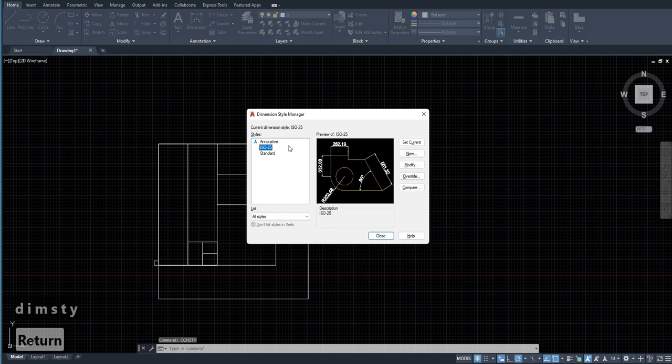So, to insert annotative dimensions, you just need to go to the dimension style by using the DIMSTYLE command and press enter. Over here, you can choose the annotative dimensions and select to modify them. Over here, the arrow size is written as 2.5. I think that is pretty convenient for me.

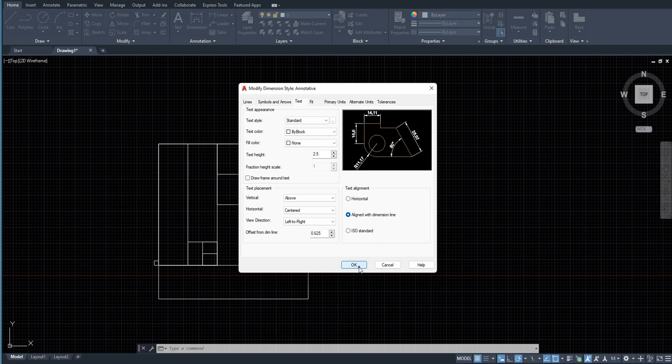Second, I'll just go and see the text size, that is also 2.5 millimeter. I guess that is also quite convenient for me, and I can just select OK, and close the dimension style manager. Over here we have the annotative dimension active.

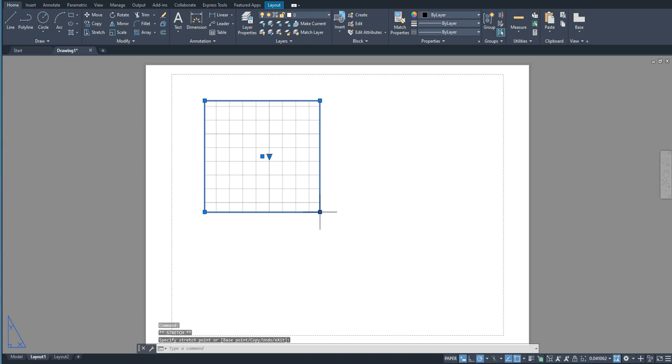If we go to our layout tab and we see our viewport, we can see that there is one viewport. I am going to make two viewports over here with different scales. So over here I'm going to make one viewport with one scale. Say 1:20. 1:20 is also quite big. Let's make it 1:10.

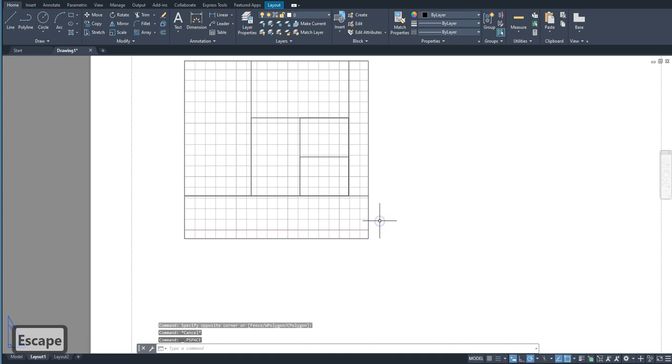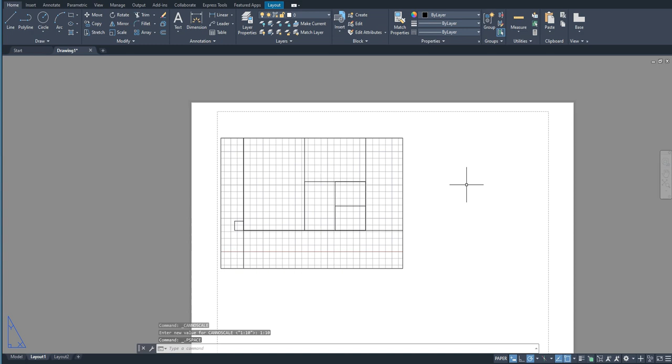In this video, we'd also be learning how to work in multiple viewports. So over here you can see I have one particular viewport on. This is my one viewport. And to insert another viewport, I'm going to enter the command viewport. And I'm going to click on OK here.

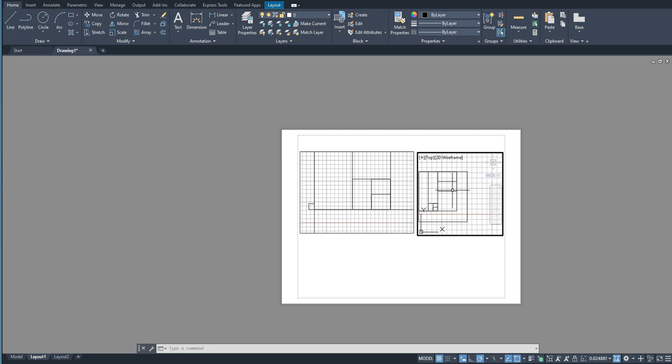I'll specify the first corner of the viewport and the second corner of the viewport. Over here I can already see the object that is there. You can select the scale, say 1:50. 1:50 is quite too big. I guess 1:40 would do fine.

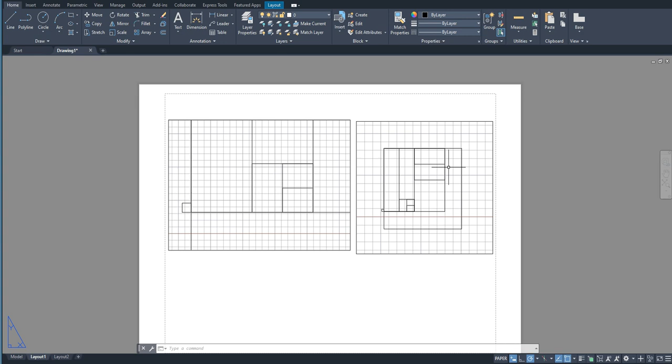So we have two viewports over here. This one is a detailed view and this one is an overall view of our object. This one's scale is 1:40, whereas this one's scale is 1:10. So let's just go back to our model. Over here we can select the scale to 1:10. So that means that 1:10 is going to showcase this particular viewport.

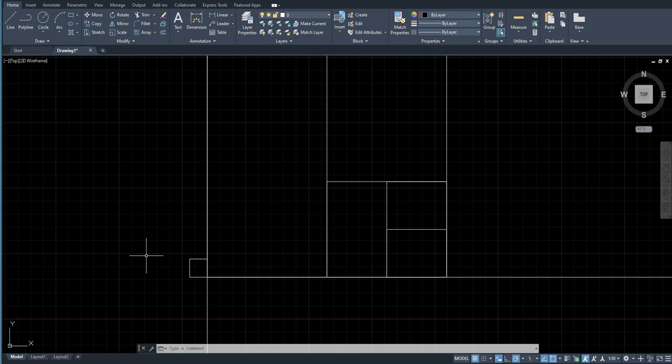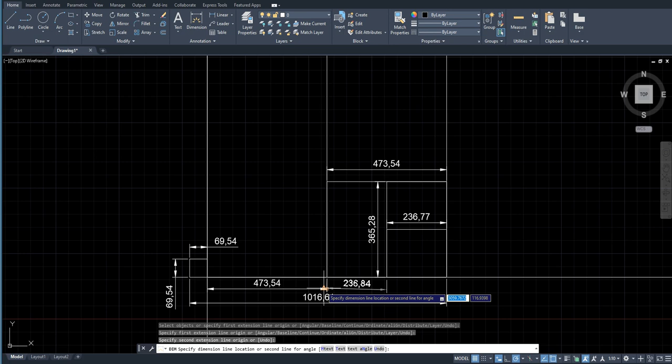I'm going to enter dimension styles and mark my dimensions. As you already saw over here, we took completely random dimensions. And now I'm going to make dimensions for the scale 1:40.

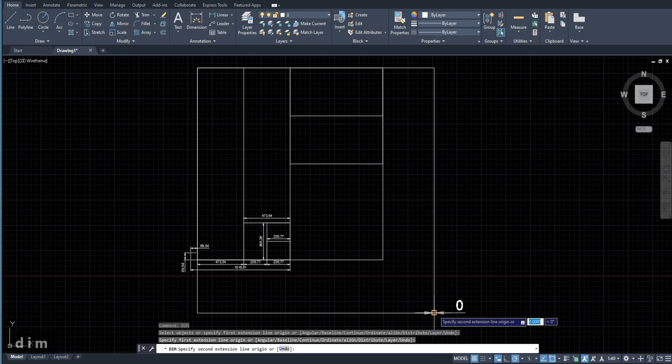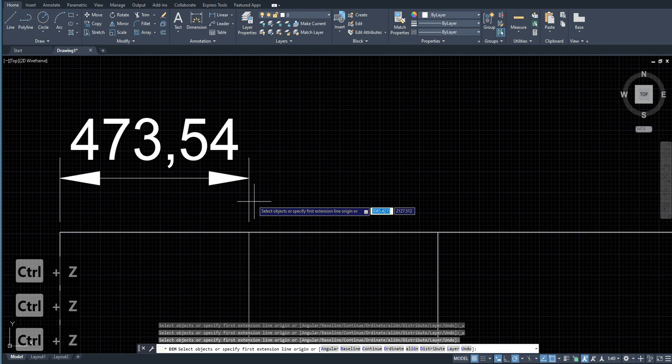If you saw what I did, this is a pretty quick way of making dimensions. I just pressed Ctrl+Z to teach you. You just make one dimension, and if you want to make dimensions in continuation, you just select this particular line, select the extension line over here, and you can just continue making dimensions. That way you won't have to double click to make each and every dimension.

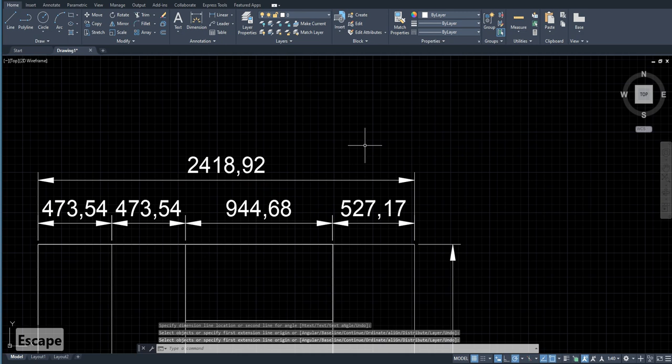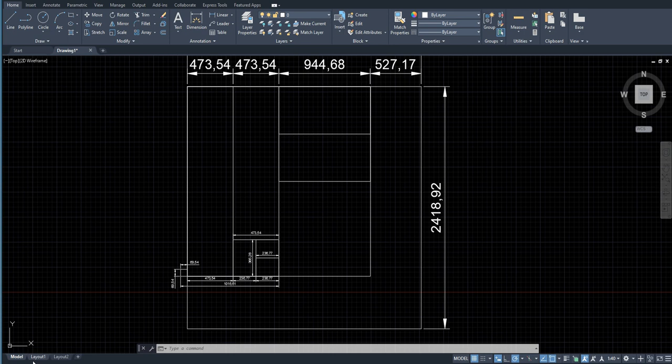You can also turn on the ortho mode if you want your dimensions to be perfectly horizontal or vertical. That way it'll avoid making mistakes. Now you can see over here that we have dimensions both in scale 1:10 and 1:40. Now if you go to layout 1, you can see that these appear to be the same size on the paper, that is 2.5 mm.

If you notice that these dimensions are not appearing over here, that's because this viewport is made in scale 1:40. So only dimensions which are made in the scale 1:40 are going to appear over here. Similarly with this viewport, only the dimensions that are made in the scale 1:10 are going to appear here. That way your drawing can be neat, clean and organized at the same time.

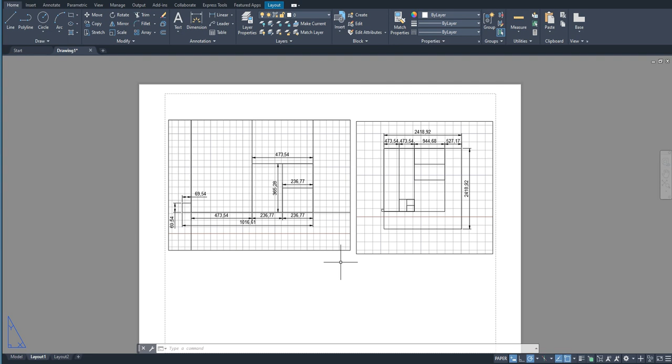Now let us see the command hatch. Going back to our model, I'll just delete all these dimensions over here.

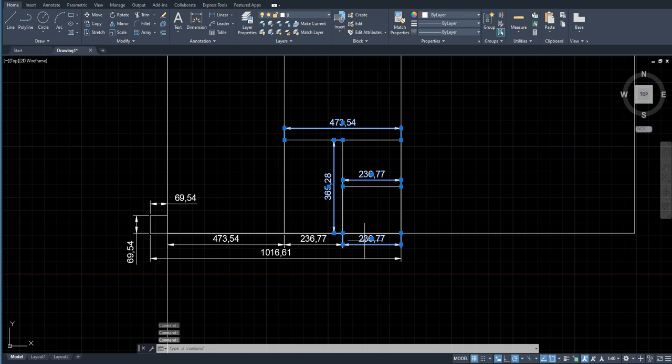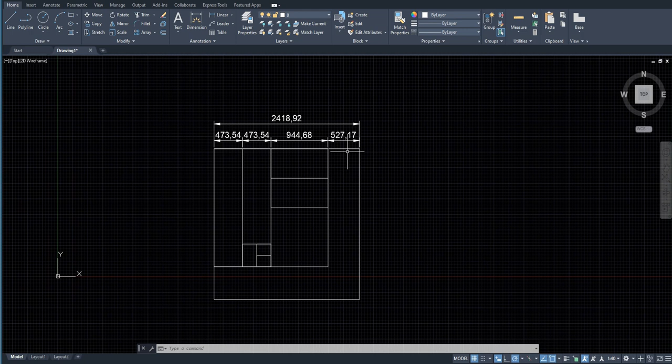By the way, I'll just tell you a new trick that just came to my mind. If you are really lazy or you just forget to change the layers while making dimensions, for example, if I want to put dimensions in one particular layer, and I always forget to change the layers while making dimensions, I mean I am forgetful like that. If you are like me too, then you can just use the command DIMLAYER.

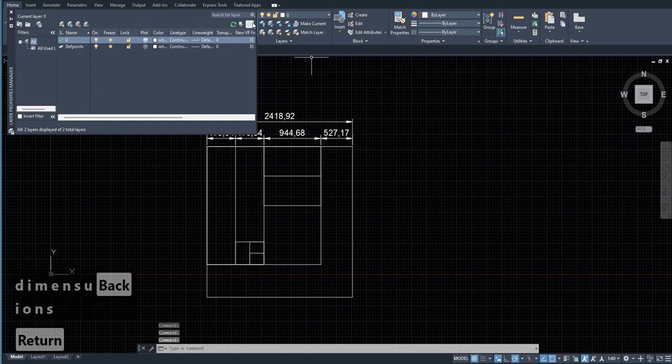Press enter. It's asking me if I want to put all the dimensions in the current layer, but I'm not going to put them in the current layer. I'm going to put them in the layer dimensions. I'm going to press enter, and if you see the layer properties, there would be a new layer called dimensions.

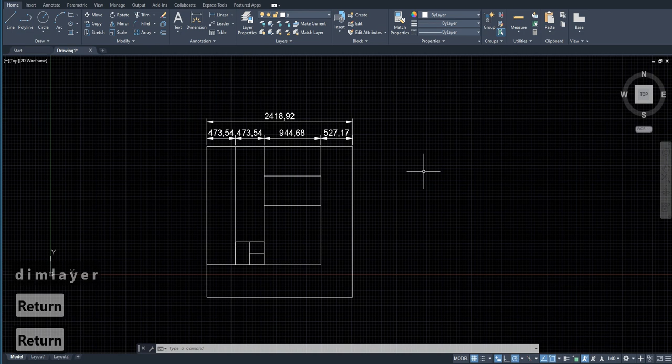I guess I didn't create the layer beforehand. I'm going to have to do the process all over again. Dim layer, enter, dimensions, enter. Now whatever dimensions that I enter after this, they are going to be in that particular layer. For example, if I create a dimension like this and I select this, it's going to be in the layer dimensions automatically. So that's how the dim layer command works.

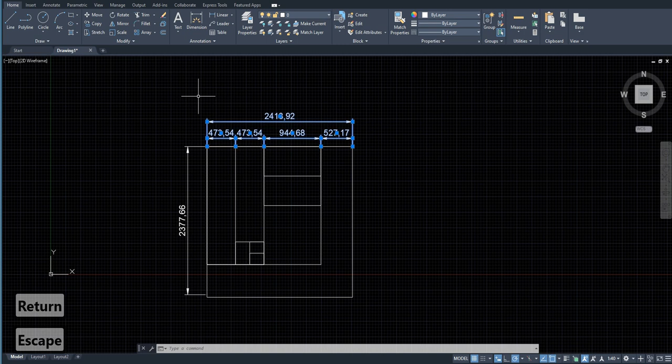If you have it on, good for you. If you don't, if you remember to change the layer each time you enter dimensions, then it's good for you as well. The next thing I'm going to be teaching you is how to work with hatches. So hatches are fairly simple, and over here there's an icon. It fills an enclosed area or selected objects with a hatch pattern or fill.

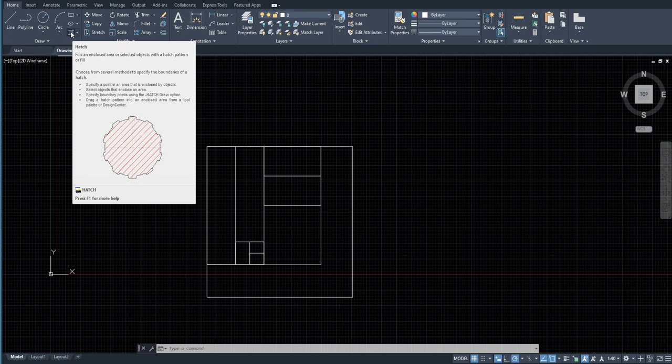So if you select the command hatch, a new ribbon over here appears. You can see that there are different patterns over here: solid, angle, and bricks, concrete, roof, clay, flex, grass. There are all these different hatches available over here. You can also use solid patterns, you can use gradients, or you can use user defined options as well.

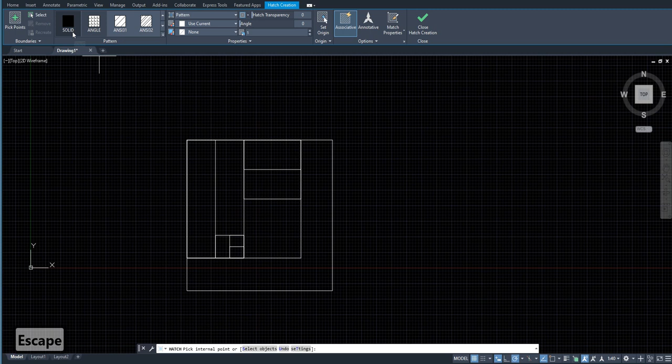You can change the layer, you can change the color of the hatch, you can change the transparency, the angle, the scale, etc. Now let me just show you how the hatch command works. I just press on the hatch command, use a solid tool, and just go over any enclosed area, for example this rectangle over here, and click. So now this rectangle is hatched, but as you can see there is no hatch visible. That's because we selected a solid hatch over here.

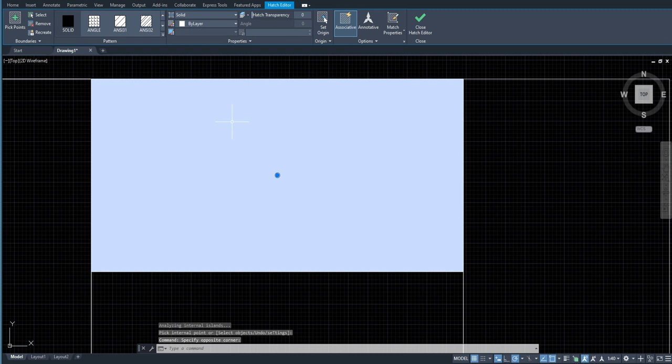If I change the hatch to this, you can see it's still appearing to be solid. That is because the scale is set to 1. If the scale is set to 1, that means that the distance between these two lines is going to be 1 millimeter. So if you want to change the scale, you can change the scale to say 10. Now you can see the hatch very clearly.

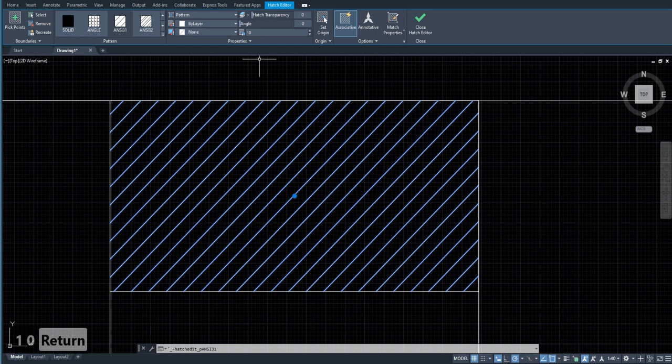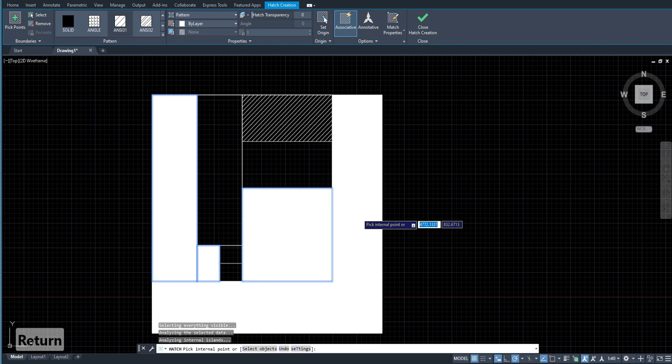If you want to hatch multiple objects at the same time and you want the hatch to behave as one singular object, it's fairly simple. You just select it, go over different areas, and press enter. You can see how these different objects are appearing to be a single object. You can increase the scale of the hatch by pressing enter.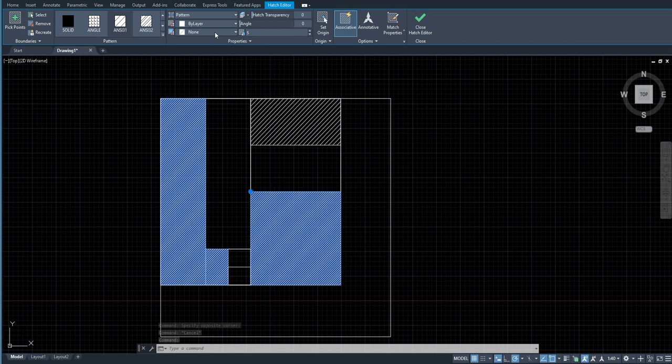You can also change the color over here. There are various color options available over here. You can change the color to say this. You can change the color to anything. This particular option changes the color of the hatch. For example, it changes the color of the line over here. If I choose this, it changed the color of the line.

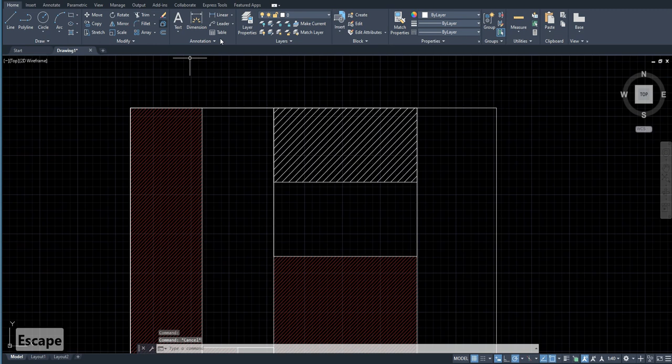But if I choose this one, it's going to change the color of the background of the hatch. For example, if I choose yellow, it changed the background of the hatch to yellow. I'm just going to delete this hatch for now.

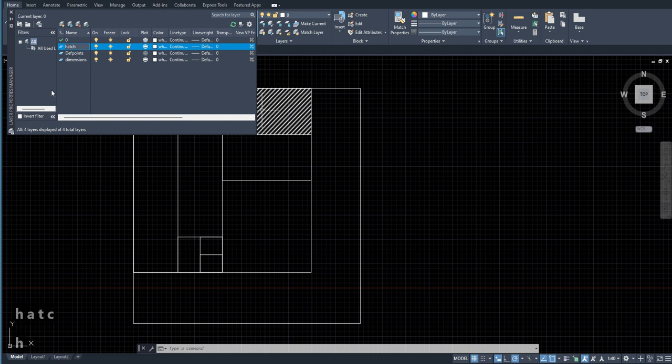Since I showed you one particular command in which you can put the dimensions directly into the layer of dimensions, you can also use a similar command for hatch. For example, if you just go to the layer properties and add a layer of hatch like this and press enter, we've created a new layer for hatch. The command for that is HPLAYER. Using this command, you can enter the layer for hatch and press enter. From here on, whatever hatch you do is going to go directly into that particular layer.

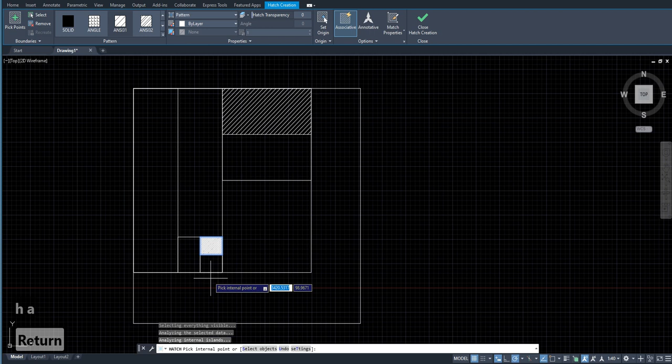Let's just try this feature out. I just pick this internal point and this internal point. If I select this and go to the home tab, I can see that this hatch has appeared in the layer hatch.

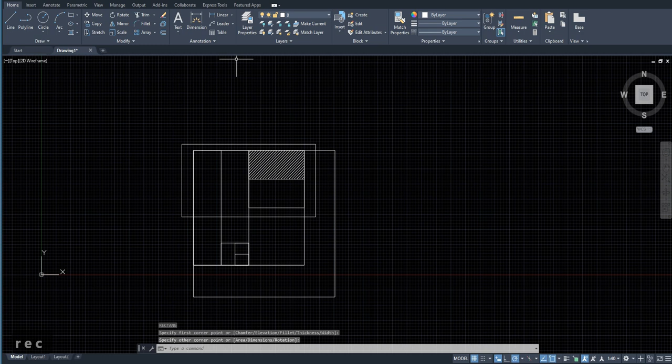The second thing that I'm going to show you is how to use hatch transparency to highlight objects. For example, if I want to highlight this particular area in this rectangle, what I'm going to do is go to the layer properties. I'm going to deselect all the layers. I'm going to make a new layer for the rectangle. A new layer, rectangle.

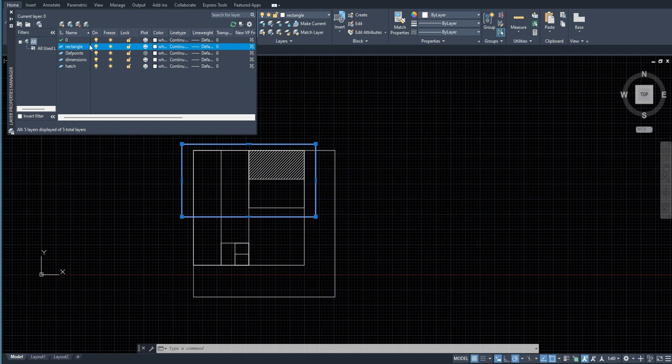I'm going to put this rectangle into my layer. And I'm going to select all but current, and turn off all the layers. Now I'm going to hatch this particular rectangle in a solid way.

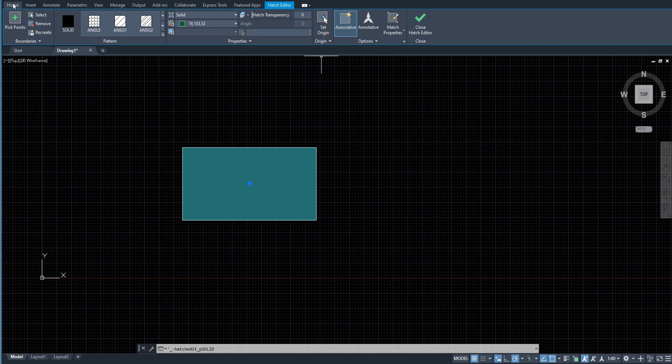And the hatch has not appeared. The reason it hasn't appeared is because it went automatically to the layer hatch and we turned it off. So I'm just going to turn this layer on. I'm going to cancel this and I'm going to change its properties. I'm going to change it to solid and I'm going to change it to green. Now I'm going to go to the home tab and put all the layers to on.

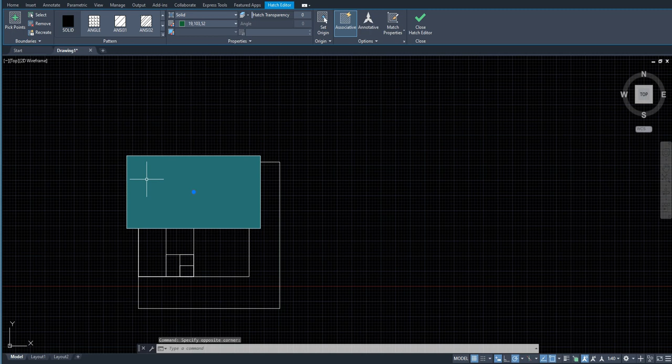But as you can see, the hatch has covered all the objects and it's not showing any of the objects that were there already. So if you want to push the hatch towards the back, just select it, right click it, go to the draw order and select send to back. Now you can see all the objects have come forward and the hatch has gone backward.

But still, if you want to increase the visibility of these other objects, you can just select the layer hatch. You can increase the hatch transparency from here and you can press escape. Now I can see the hatch layers and my objects very clearly.

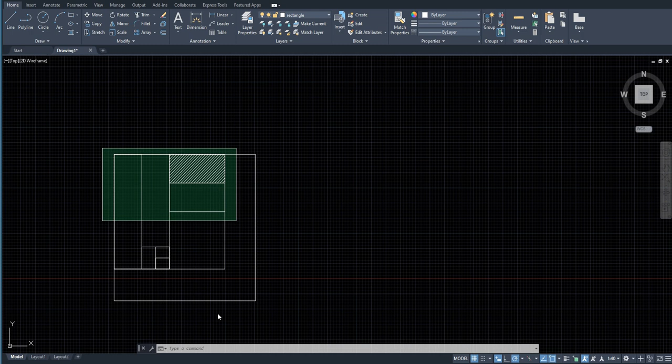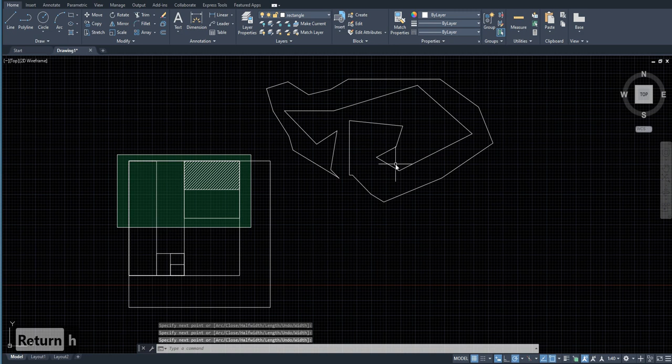It is recommended to create a different hatch layer for the hatch command. It is recommended because when we are working in a drawing with a lot of hatch objects, the computer may get a bit slow, specifically if you're working with patterns. For example, if I select a complex shape, let me just make it a bit complex. And if I try to hatch this, it's going to take a while. So I would recommend using a solid hatch first because it fills easily, and then you can later change the hatch type to whatever you want.

I would also recommend that you freeze your hatch layer whenever you are working on the other parts of your drawing, because the hatch layer tends to consume a lot of resources and your computer tends to become a little lethargic.

Now I'm going to teach you how to calculate areas in AutoCAD. To calculate areas, either you can enter the command AA, or you can go over here and, using the drop down menu, select the area. For example, if I want the area of this rectangle, I can go to all the corners of the rectangle and you can see a solid green region is being shaded. That green region denotes the total area it is going to tell us. I'm just going to press enter.

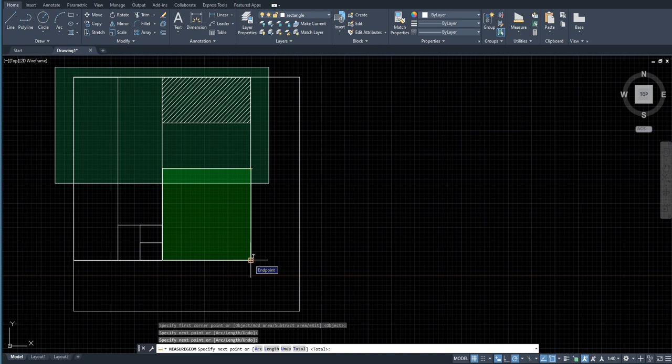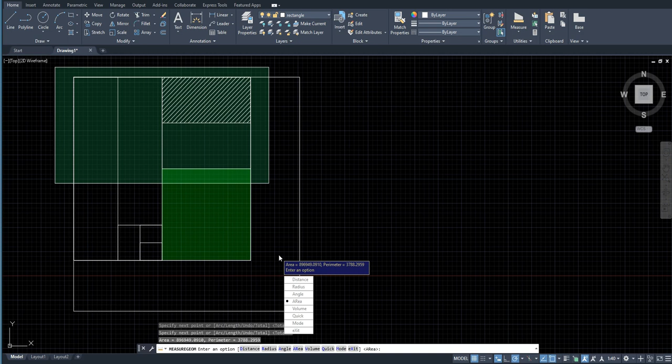The area it's showing is 896949.0910 and the perimeter it shows to be 3788. So that's how the measure tool works and that's how we calculate area. But there are several other uses of the area command.

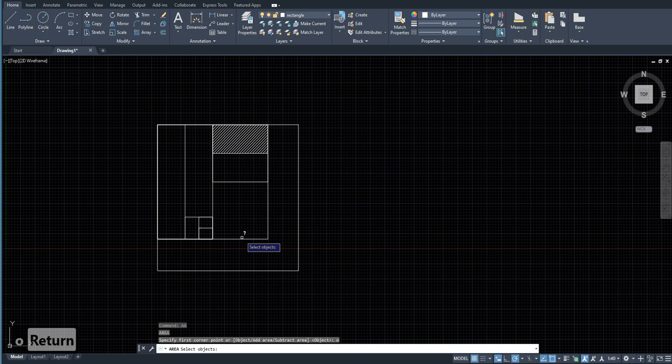If I enter the command AA, there are options for object, add area and subtract area. If I select object, I just need to select one particular object. For example, if I select this huge square over here, it tells me the area of that directly.

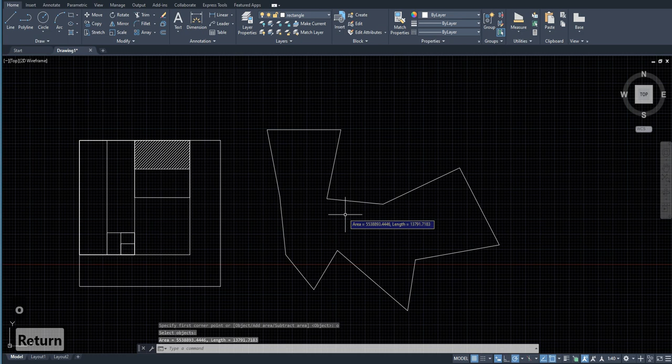Similarly, if I have a polyline like this and use the command AA, going to each of the points to shade every region is going to be a long and tedious task. So for that, I just use the object option, press enter and select this polyline to know its area and length. So that's how the object option in the area command works.

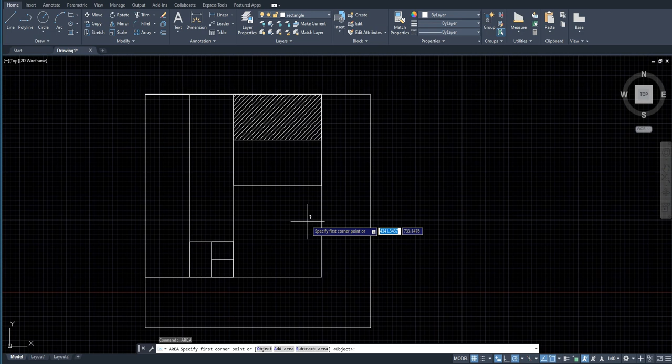Another way to find out areas is to use the area command, and if I want to add certain areas, I use add area. For that, I just press A. I want to add the area of this rectangle, and I press enter, and this square. You can see that both regions are now being shaded. If I press enter again, it shows me the complete area and the perimeter.

I can also add another square like this and press enter. It shows me the total area and the perimeter of the objects. If I press escape now, it just vanishes.

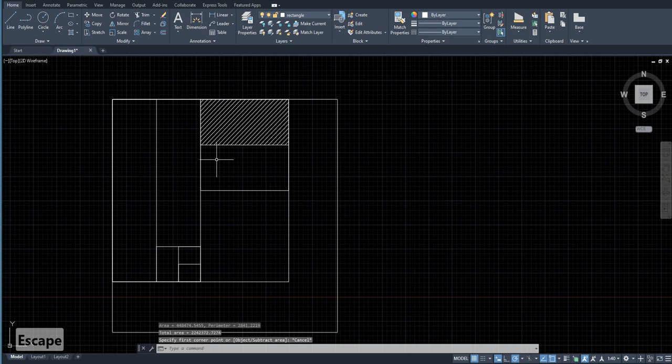Another aspect of the area command is that you can subtract areas. If I activate the area command again, I have an option for subtract area. You just press S, enter. So if you select this rectangle now, it comes shaded in red. Press enter.

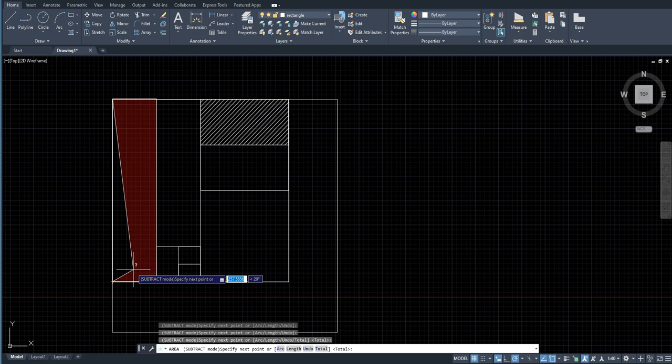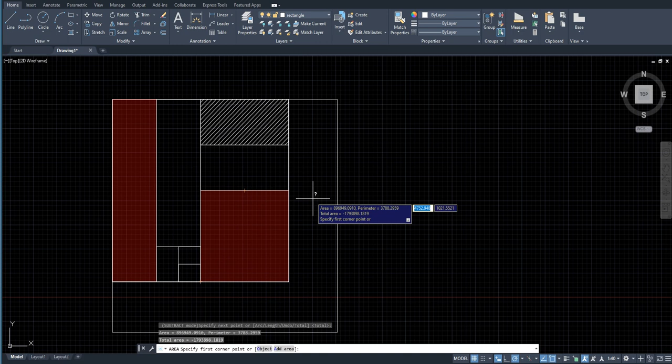If you select this rectangle and press enter, it shows the total area as negative 1793898.1819. That is because we have subtracted this area, but we haven't specified what to subtract it from. If you want to subtract this area from the complete square, we need to add the complete square.

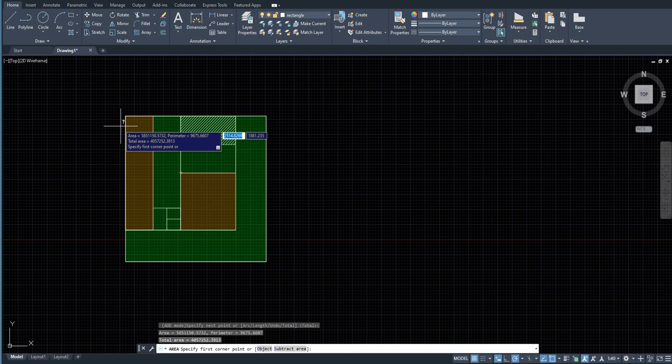For that, I use this option and select this complete square over here. And if I press enter, it shows me the total area after subtracting what's in the red shaded regions. So that's how you use the area command to add areas, subtract areas, and find the areas of polylines and their perimeter, length, etc.